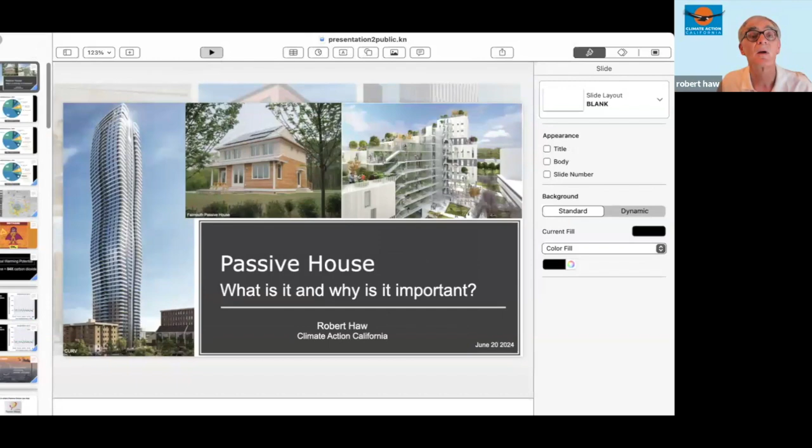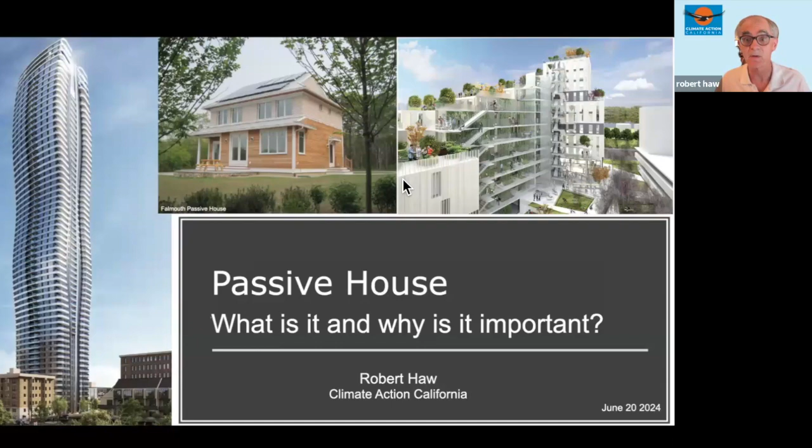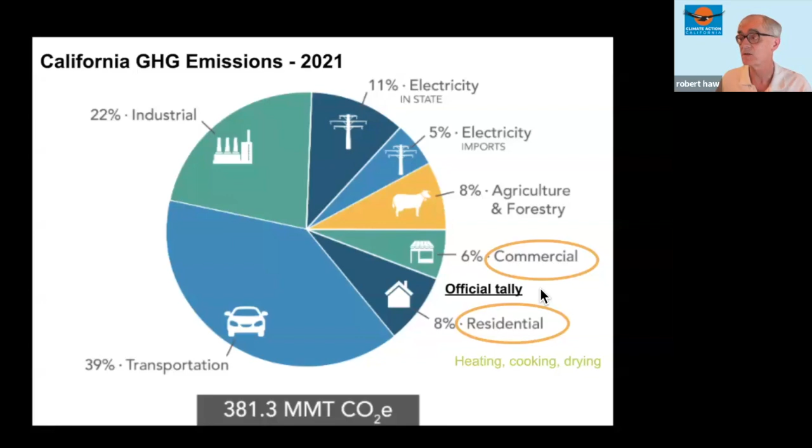Passive House, what is it and why is it important? Okay, so here's California's greenhouse emissions as of 2021. It shows all the proportion where the greenhouse gases are coming from under this pie chart. And down here in the right corner is the contribution from the built sector, commercial and residential buildings. And this is just from heating, cooking, and drying, not electricity. So that's just the official proportion based on measured consumption, but it's just the tip of the iceberg.

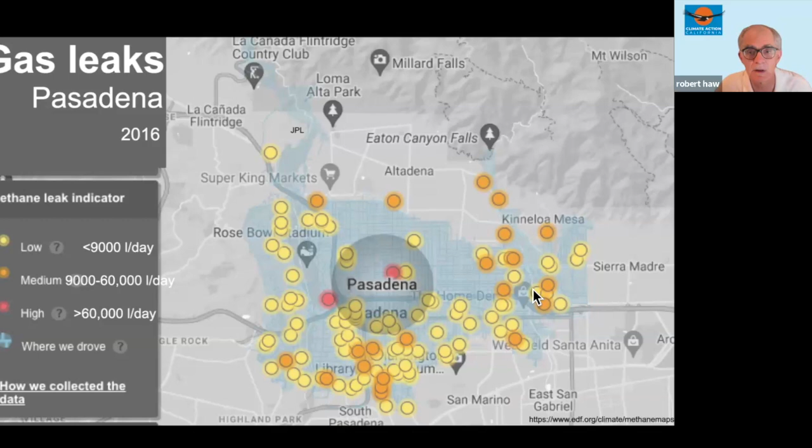Because gas leaks in natural gas distribution systems are widespread, leaks everywhere. In 2016, a JPL colleague discovered these leaks in Pasadena with a newly discovered gas sniffer device. Since then, leaks like this have been found in cities all across America. And it goes all the way back to the fracking fields. These leaks consist mostly of methane, the primary component of natural gas.

Over roughly the same time period, carbon dioxide's concentration has increased around 1.5 times, but methane has increased 3 times. So there's twice as much impact now from methane, just based on concentration. But of course, it's 84 times more powerful than carbon dioxide. Other people have made estimates, and of the 1.5 degrees warming that has happened to date from the pre-industrial era, around half is due to methane.

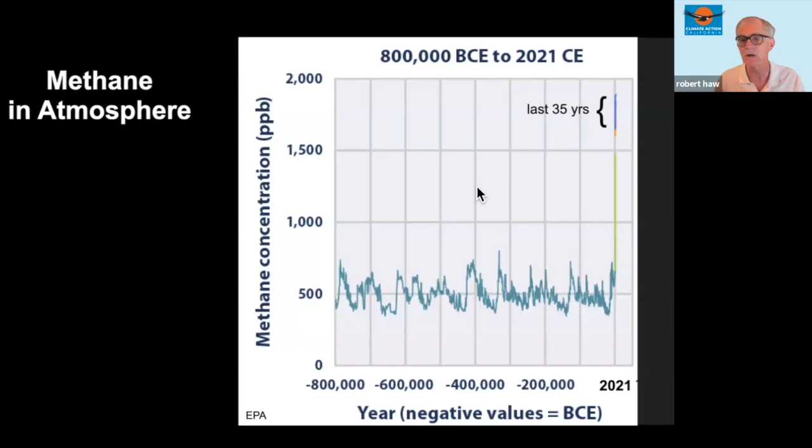And that's a real risk because it can lead to unexpected feedback loops. Positive feedback loops can destabilize climate systems, where one bad condition reinforces another over and over. For example, the melting of the permafrost in the Arctic, which releases even more methane. Sometimes that's referred to as a vicious cycle. And this is where passive house can help.

Have you heard of the Icebox Challenge? A competition is set up where two static boxes are built, perhaps with windows in them. One box is built to the building code, and one box is built like a passive house, but there's no other mechanical equipment. They're just static passive boxes. You take 1,800 pounds of ice and load them into those boxes, in late spring or summer. And you seal them up and you wait a month.

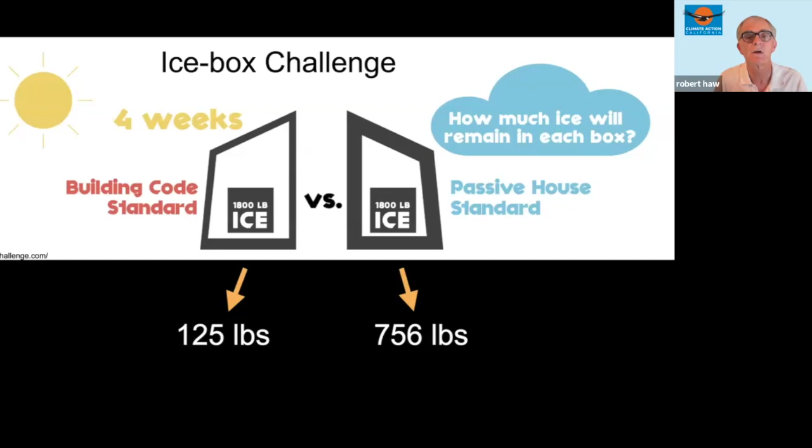The challenge is to determine how much ice will remain in each box, the building code standard and the passive house standard. These are representative numbers. It differs a little each time, but usually around 6 or 7 times more ice remains in the passive house box than in the building code box. And this works on full-size buildings too.

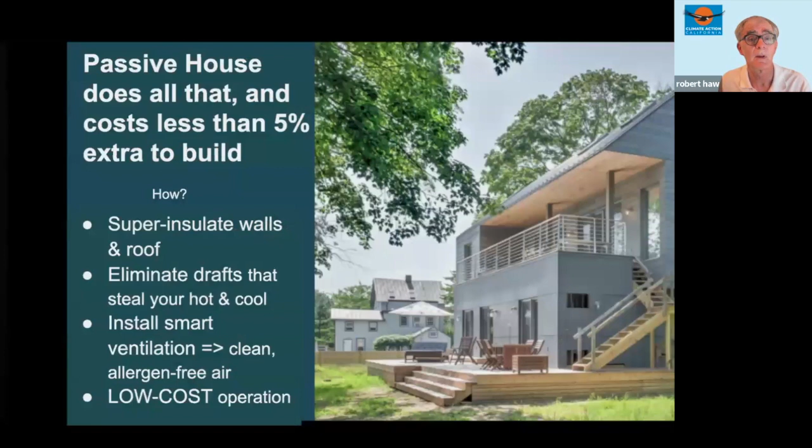Passive house slashes utility bills by 50% in California, more in other states that don't have such advanced standards as California's code. It also increases the quiet and comfort inside your home and makes it smoke tight. Passive house does all that and costs less than 5% extra to build.

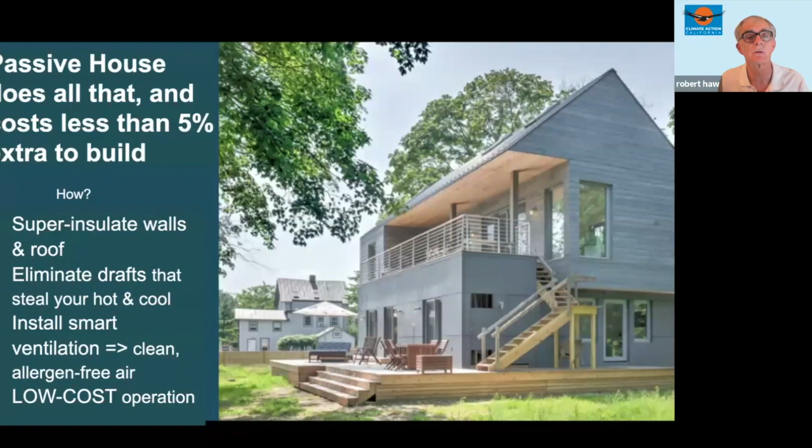It does that by super insulating the walls and the roof, installing high performance windows, eliminating drafts that steal your heat and cool, and installing smart ventilation, which provides clean, allergen-free air. All of this contributes to a low cost of operations of that building.

So, can you find the passive house? This is an infrared photograph, and so heat shows up here as red or orange color. And you can see that the passive house starkly differs from its neighbors. It's the blue house where the arrow is pointing. All the other units have a lot of heat escaping from them. The passive house has been thermally insulated and does a really good job at keeping heat inside the dwelling.

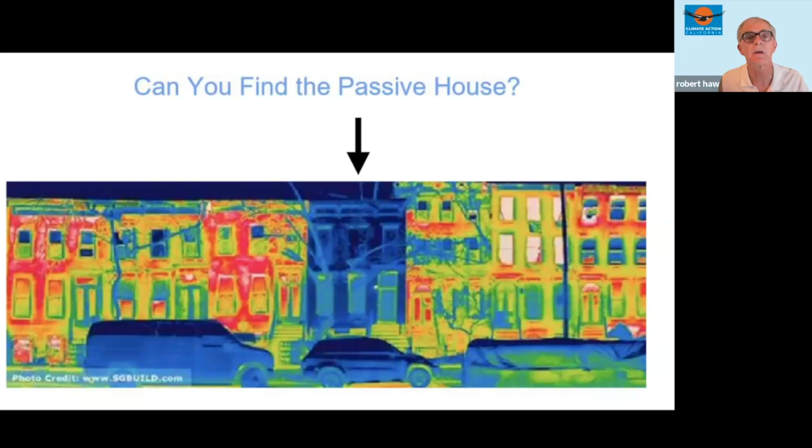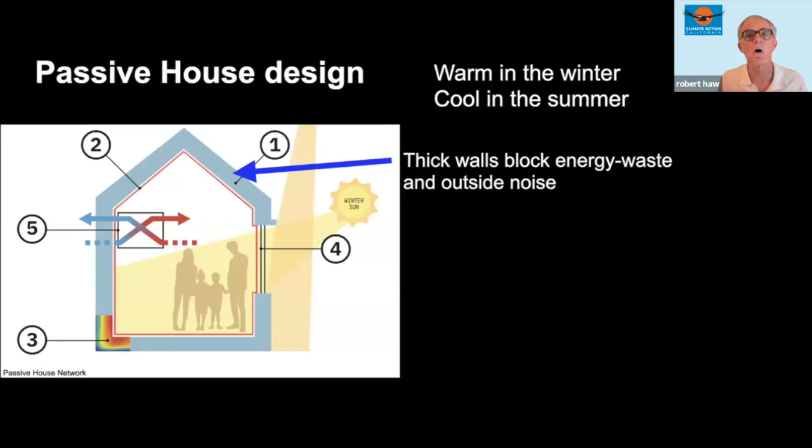So passive house design keeps you warm in the winter and cool in the summer. Thick walls block energy waste and block outside noise. A smart device brings in fresh air, filters it, and keeps warmth and coolness in the house. And then the house is designed to the extent possible to admit sun in the winter, to warm the house up, and to keep as much sun as possible out in the summer. So sunshine in the winter, none in the summer. And that leads to superior performance of the building.

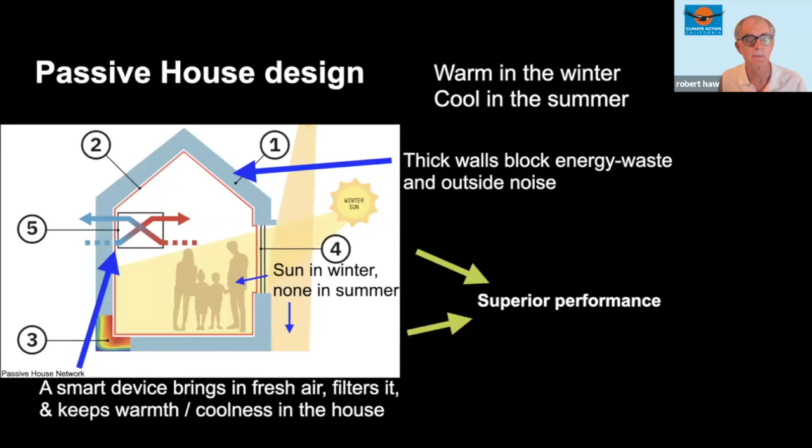But a passive house does more. It reduces greenhouse gases and helps fulfill climate targets. As I mentioned, it uses a lot less energy, and that leads to smaller peak loads. And peak loads are what occur during, say, the dinner time hour when everybody's turning on all their ovens and everybody's arriving back home. And that leads to more energy needing to be generated by the utility company. And generally to fill that gap with that extra energy, they have to build peaker plants. These are generation plants that are just used during those peak hours.

But to this day, most of those plants, those energy generators, are powered with natural gas. That's slowly changing, but there's still pressure to build those and run them on natural gas, and we want to reduce that necessity. It's much easier to electrify a passive house. In fact, it's just uneconomical to run a gas line into a new passive home, because it just won't need gas in the house. And that's the way we will retire gas lines in the city, at least for new building infrastructure.

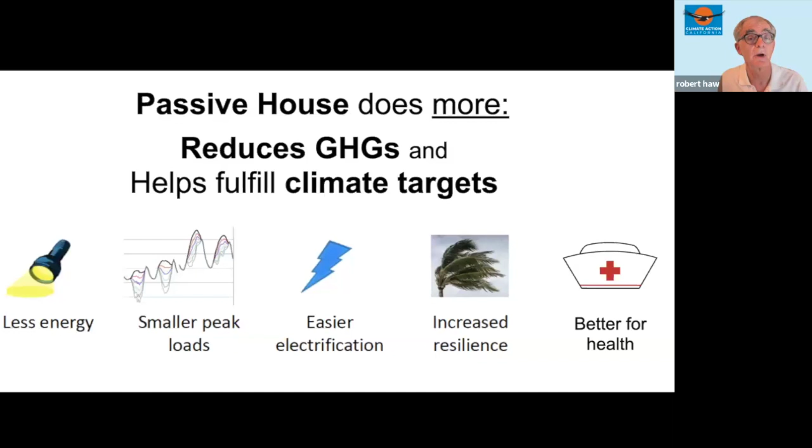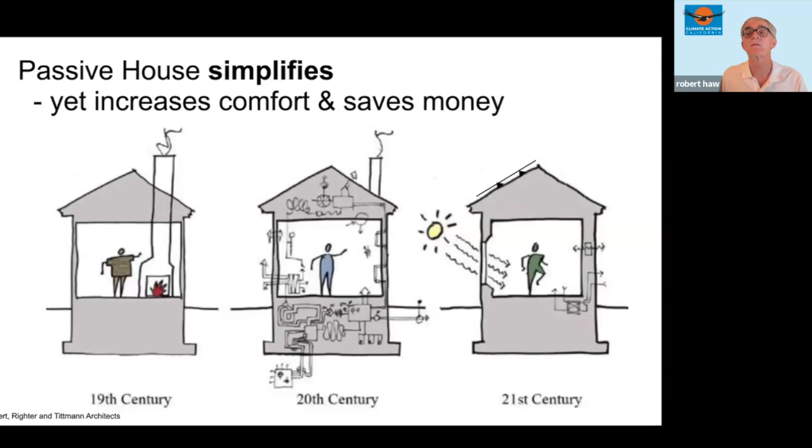There's increased resilience in a passive house. So if the power goes out, the thermal equilibrium in the house will be maintained much longer than in a code-built house, measured in days instead of hours. Or if you have a house backup battery system, it's going to be much easier to maintain power in the house for much longer if it's a passive house than a code-built house. And a passive house is better for health. You have much higher indoor air quality. As I mentioned, far fewer allergens. So passive house simplifies, yet increases comfort and saves money.

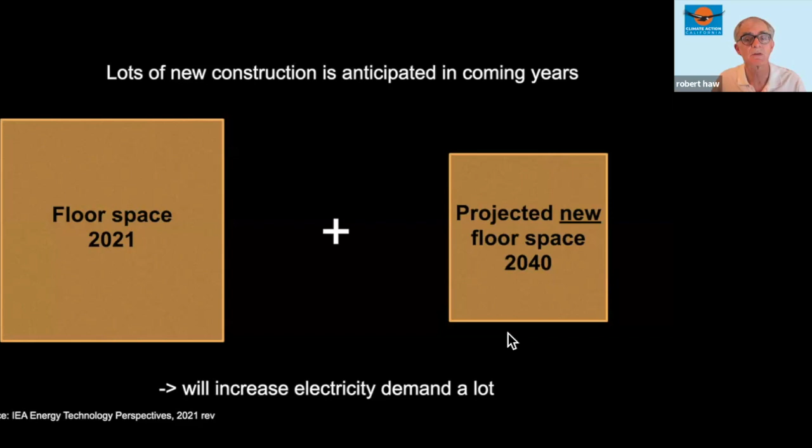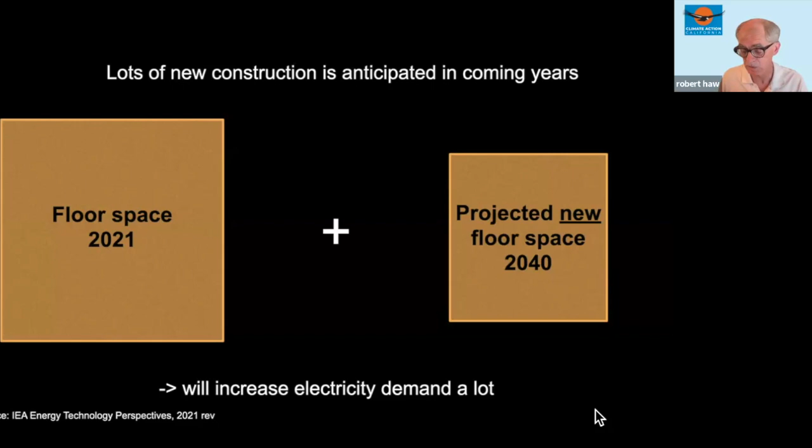So projections are that there will be a lot more new floor space needed by, in this case, 2040, but there are projections going out to 2050 and 2060. In this case, it's almost half of the existing floor space as of 2021. So all of that new floor space will increase electricity demand. In fact, electricity demand is expected to double or even triple by 2045. And that's going to introduce a massive strain on the transmission grid. It's going to also strain our plans to transition to zero carbon power because you're going to need that many more solar farms out in the desert and wind farms.

All electric passive houses can significantly reduce demand, and that will ease strain on the grid. There's no way we can achieve our climate goals without using all our available tools. And one of those tools is more efficiency, and passive house offers that in spades. So if someone wanted to build a new house to code and electrify the house, they would probably incorporate a heat pump as part of that electrification. Now, if you were to build that same house to passive house standard, it would require only 1/3 to 1/2 the size of the code-built heat pump.

So that's beneficial for lowering utility costs, but also the smaller heat pump will have a smaller loading of refrigerant. That's the working fluid that's both in heat pumps and in your refrigerator. Those will tend to leak over time, not very much at all. But the global warming potential of that refrigerant liquid is measured in 2,000 times that of carbon dioxide. So the smaller the loading you have in your heat pump, the less influence there will be on climate from those leaks.

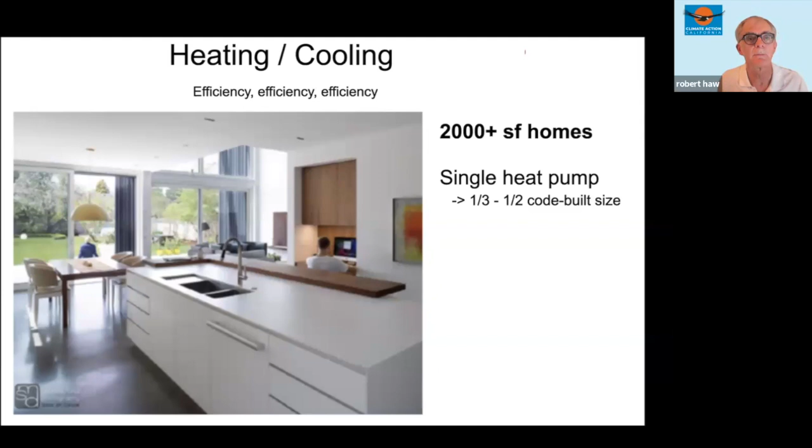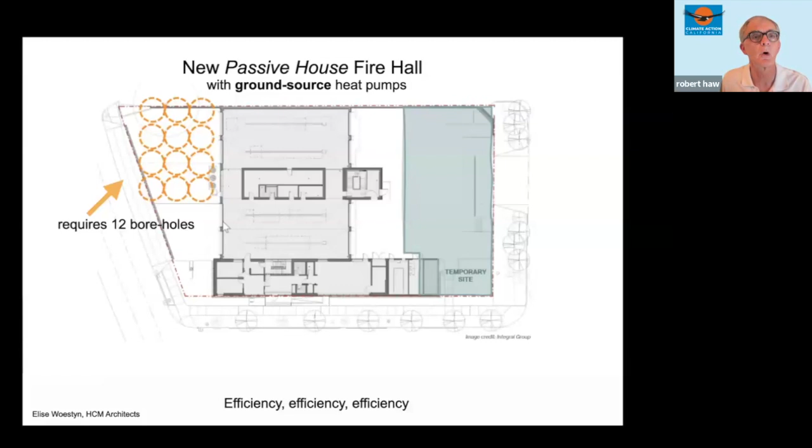Here's an example of a fire hall, a new fire station that was built to passive house standard. And the client wanted to really do the best they could in efficiency. So rather than installing air source heat pumps, they decided to install ground source heat pumps. That means they had to drill boreholes. This building requires 12 boreholes. Now, if this was built to code minimum, it would have required 70 boreholes to heat and cool that building. So just another example of the enormous efficiencies that passive houses bring.

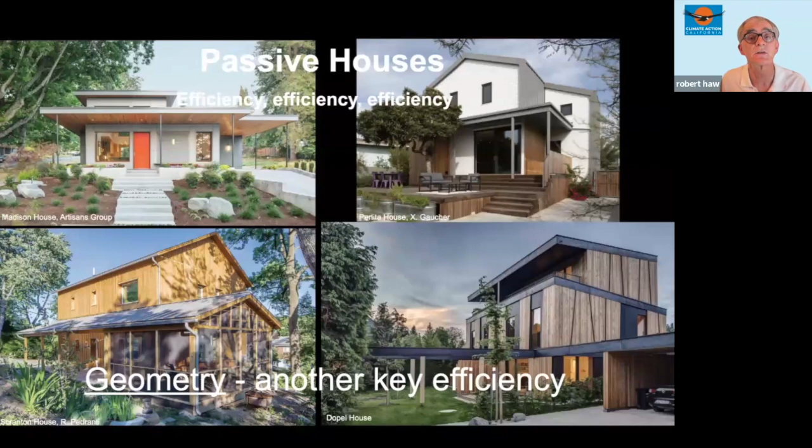Here are some photographs of passive houses around the country. And another key efficiency of passive house is simple geometry. Passive houses reduce the number of corners and edges in buildings, and heat can leak out or leak in through those edges. It also reduces surface area of the building to the extent possible for the given design.

Now, what about cost? The cost for a single family residence, as has been reported, is up to 5% higher, maybe around that region. And that's mostly due to the high-performance windows. And that extra expense can be recouped within several years. But right now, costs for multi-unit residential passive house buildings are on par with legacy construction costs. So right now, you can build a passive house multi-unit building and receive all of those passive house benefits for roughly the same cost.

And this is an opportunity for superb low-income housing projects. Think of these projects built next to freeways. The residents in there will benefit from those amenities. There'll be less outside noise. There'll be less PM 2.5 particulate pollution coming into their units. And in particular, low-income people spend a disproportionate amount of their income on energy costs. And if we can lower their utility bills significantly, that goes a long way for these folks.

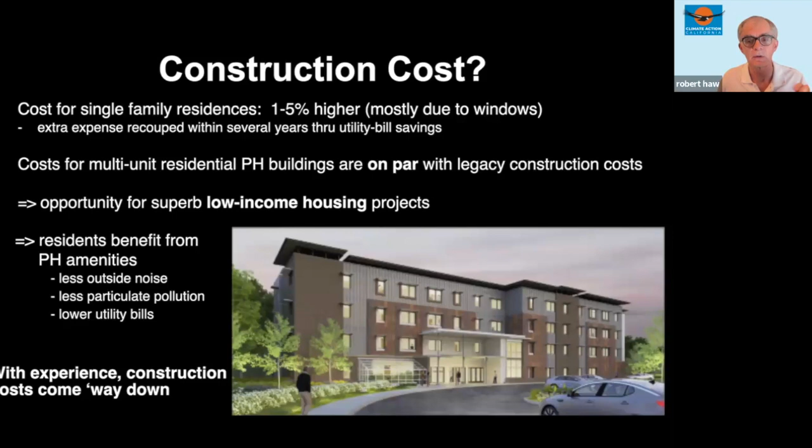And with experience in general, construction costs come way down. And that's been demonstrated in jurisdictions around the world that are far ahead of California with passive house construction. So prefabrication can bring costs down. You can take those wall assemblies and just crane them into place. There are over 80,000 passive house buildings built worldwide. Washington, Massachusetts, New York, Pennsylvania, Denver are leading proponents in the US.

So if we're going to do this, let's get it right, because buildings last a long time. So California's building code has history. It's been around for 115 years. It's tried to keep up with the times. It has respectable performance, but it is mostly a list of prescriptive steps. Each step of the way has a prescription of how to achieve that. On the other hand, passive houses are performance-based. They are just looking at the end result and does it achieve this very high, very efficient thermal standard.

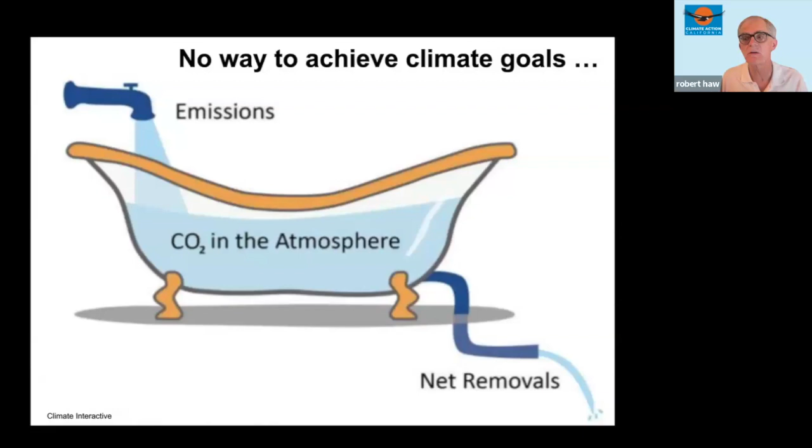So this standard was developed with this in mind 35 years ago by German physicists. It's top-notch, all-encompassing, and rigorous. In my view, it's the best at-scale method we have for future-proofing homes. So there's no way to achieve climate goals without using all our available tools. So the current situation is that California's code does not require smoke-tight buildings. It does not include heat leakage criteria, and it has no comfort criteria for the occupants. Passive House includes all of that in its certification.

So the proposed legislation would apply to new construction only. There would be voluntary compliance only, but this prepares the way for future adoption of Passive House as a mandatory standard. And this legislation expects no financial support from the state. But there is non-programmatic funding available. The investor-owned utilities, SoCal Edison, PG&E, are offering money now with new programs. They're just a couple of months old. So offering money for Passive House construction, both in single-family homes and multi-residential blocks.

SCE actually has a program where they'll offer up to $30,000 for a passive house construction. And then there's federal money also available through the Inflation Reduction Act, up to $14,000 for passive house components such as insulation, air tightness parts, and Energy Star appliances.